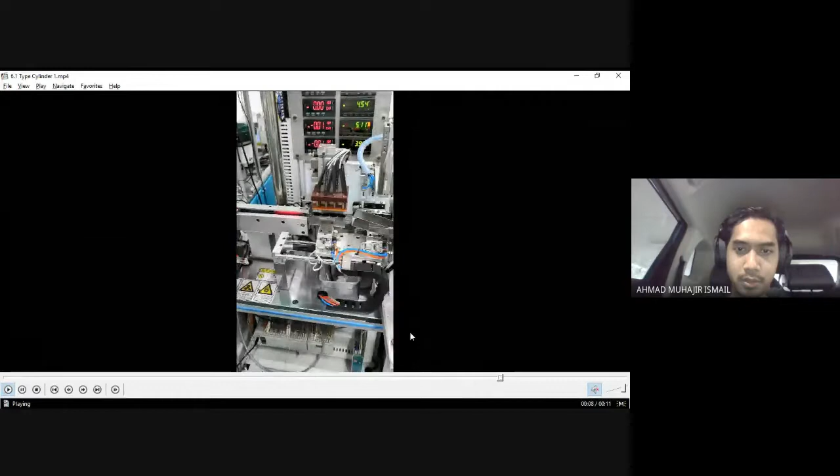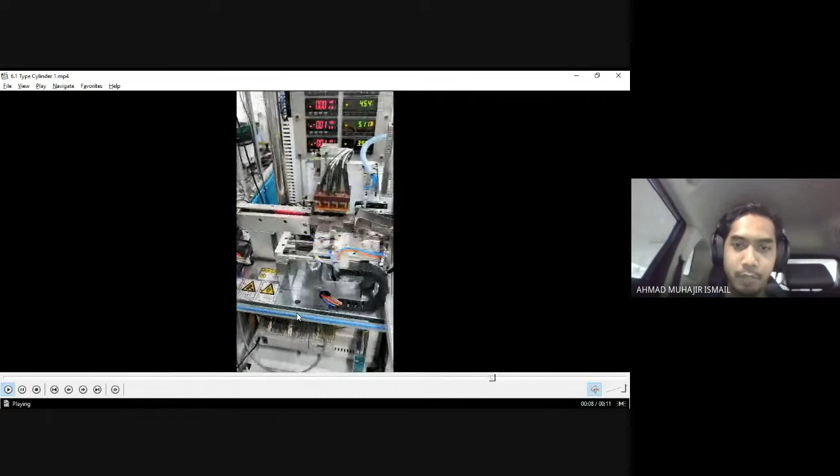Contoh pneumatic system yang kita guna as a transferring product. Kita pick and place lah. So dalam sistem ni kita cuma ada yang mostly kita guna adalah linear cylinder, movement forward backward, dan kita ada turning dan chuck. So tiga ni mainly used in kita punya factory lah.

Macam konsep ni just transfer from one conveyor to another conveyor. Simple. Walaupun kompleks mana pun, yang ni basic lah, selalunya kita akan guna. Dan kita ada belting conveyor dan so on.

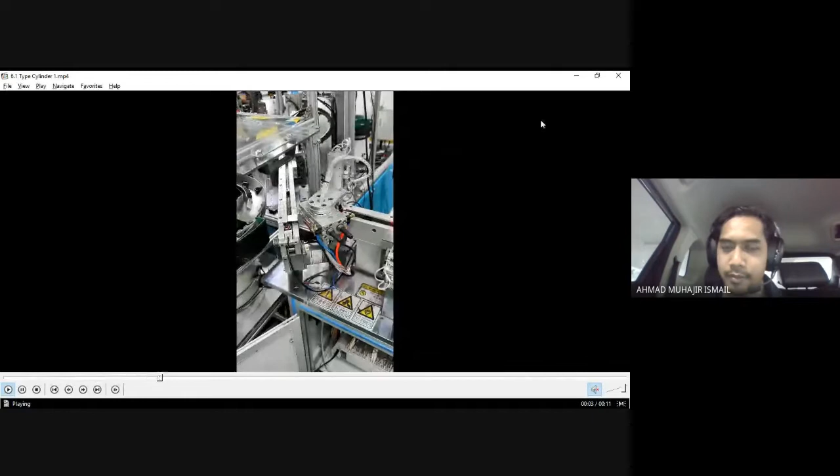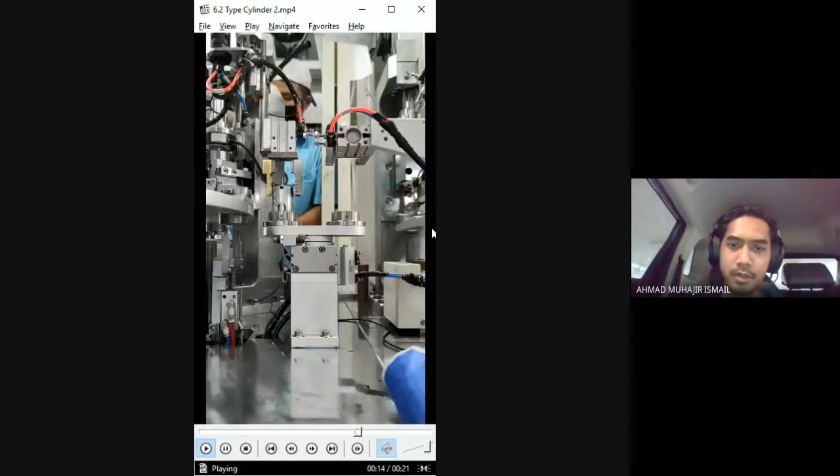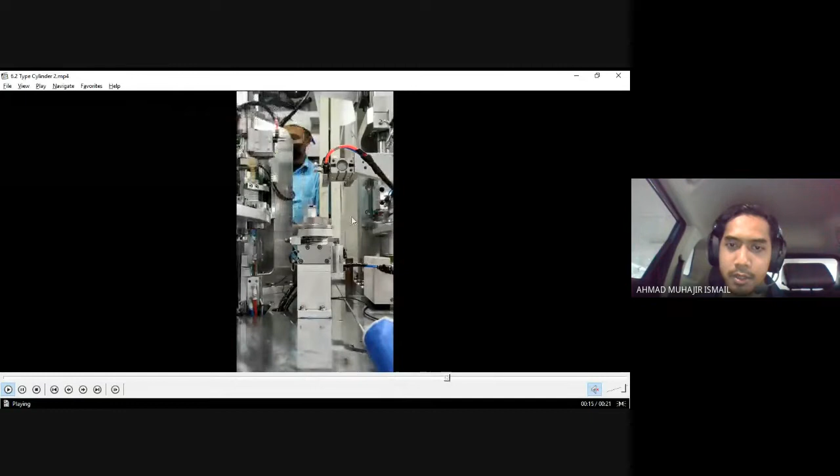Satu lagi. Sini yang dah motor kita transfer daripada turntable. Dan sini kita panggil turning cylinder. Yang ni kita boleh control 180 forward backward. Dan kita ada chuck yang move up down dan clamp.

Macam ni lah. So boleh nampak dekat mana pneumatic lah.

So pneumatic ni kita control by PLC. PLC akan generate the supply to the valve, dan valve akan control the flow of compressed air. So ini antara PLC yang kami guna. Saya sharekan.

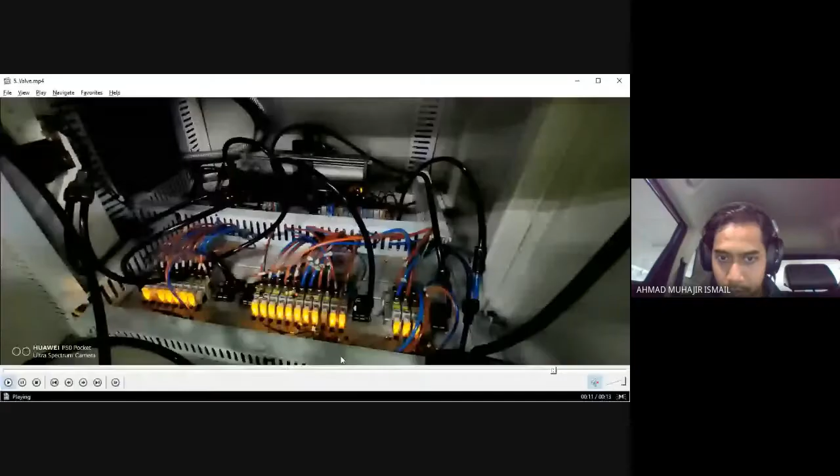So the valve, flow valve, okay, ni kita punya valve. Lihat. So nampak lampu yang menyala-nyala tu, 24 volt dah masuk dan dia akan open the valve, flow in dan flow out.

So sini kita ada satu kita panggil booster untuk control the pressure in our machine sebab mungkin daripada kompresor kita jauh, lebih kurang mungkin dalam 100 meter daripada mesin ni atau mungkin 200 meter dekat kita punya sistem. So mungkin akan dapat less pressure drop. So this booster akan regenerate the pressure untuk maintain our requirement pressure for our machine. And we use about 0.5 MPa.

Okay. So far ada apa pertanyaan tak? Clear?

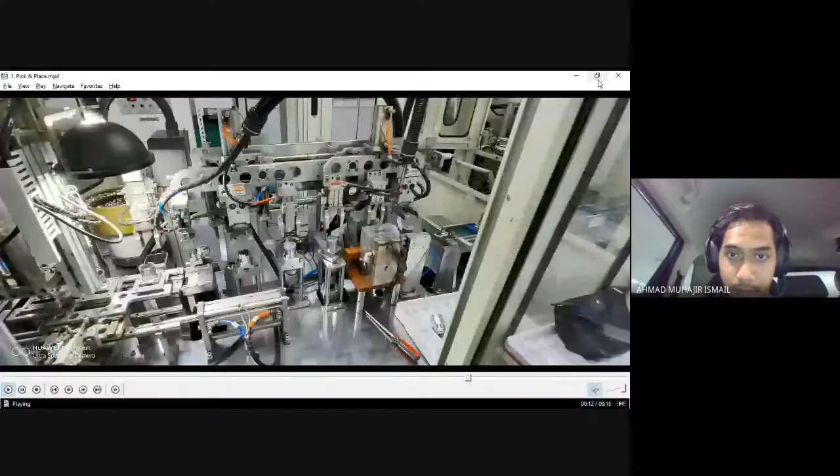Okay, this is an example, you can see. This is how a frame is transferred, we are using a pallet, then there is a transfer post by post.

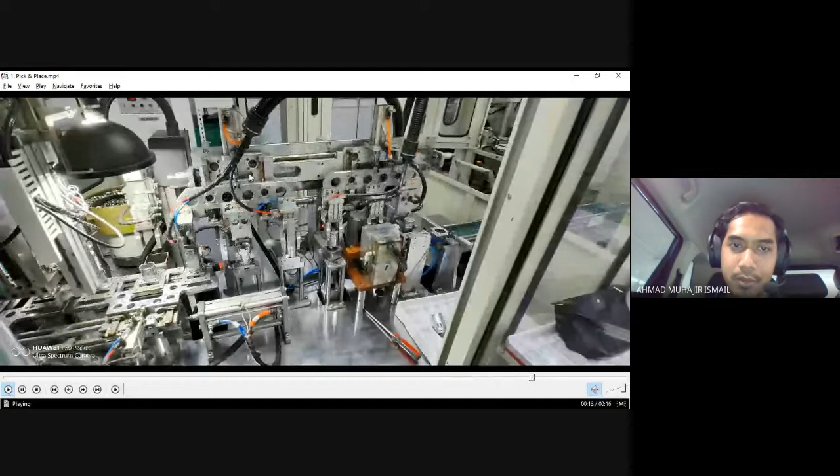On the safety matter, this chuck must be open. Every chuck has a sensor to make sure everything is open, only then this thing can come down to pick the product. In case the chuck is not open, it will hit the product. Same with movement forward and backward, there's a sensor to make sure this cylinder is up or down. You can see this red color meaning the position is up, and when it goes down you'll see it blinking red below. So we make sure both cylinders are up before we can move forward. So many sensors are involved to make sure the movement is safe.

Okay, next, another pick and place, I'll show an example.

So here we have a sensor to detect the product, and we pick up, then move to our desired location, then we place it. So there is an auto feeder to supply this one, inductor, and the front is our capacitor terminal.

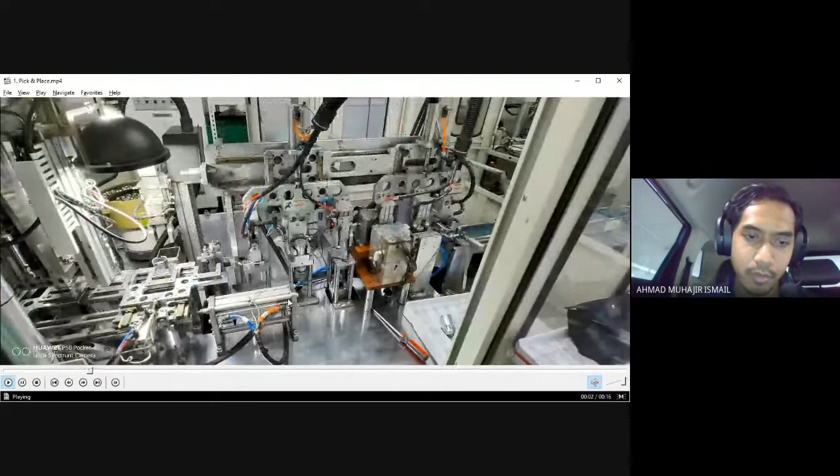Same here. So this cylinder valve turn on, then the airflow will go to the yellow to move the stroke out. And valve off, then airflow will go to the blue tubing to retract back the cylinder. Nampak? Boleh faham? Ada soalan?

Dalam chatbox ada satu lagi soalan. Okay, if we want to do maintenance on the section, do we have to stop everything else?

This is tricky because production they will try to run, and on the maintenance side we try to stop for our safety. So on the maintenance side we have to schedule it properly dengan production member. Some maintenance need to stop, some maintenance can be done online. So depend on what type of maintenance we want to do. So the best is operate online, but there is a safety concern.

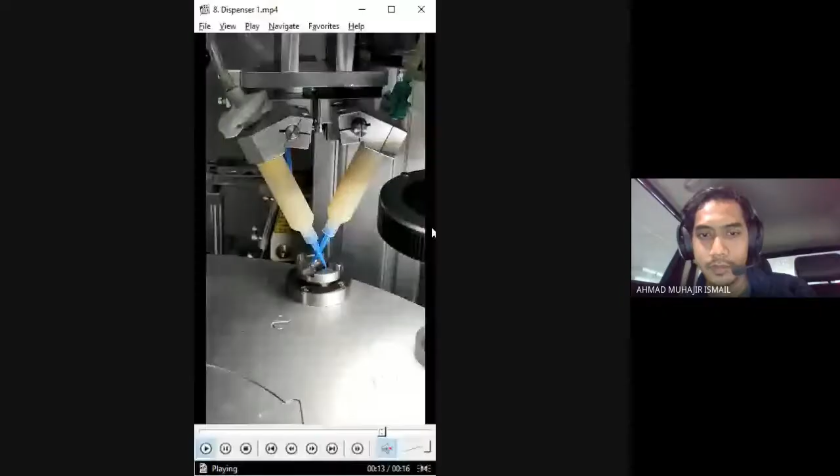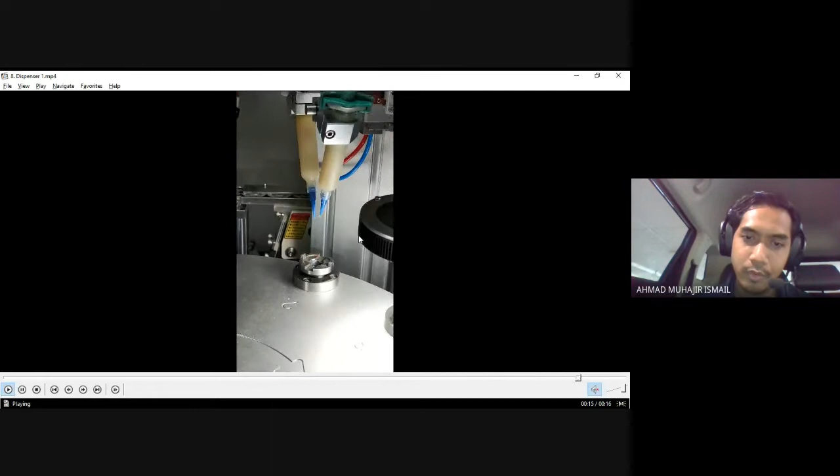Sini contoh dispenser. Saya belum tunjuk lagi kan. Di sini kita apply dispenser, apply grease, control by dispenser. So except a movement, we also control to dispense a semi-solid. And also sometimes we can apply the oil using a pneumatic system. So macam-macam boleh buat.

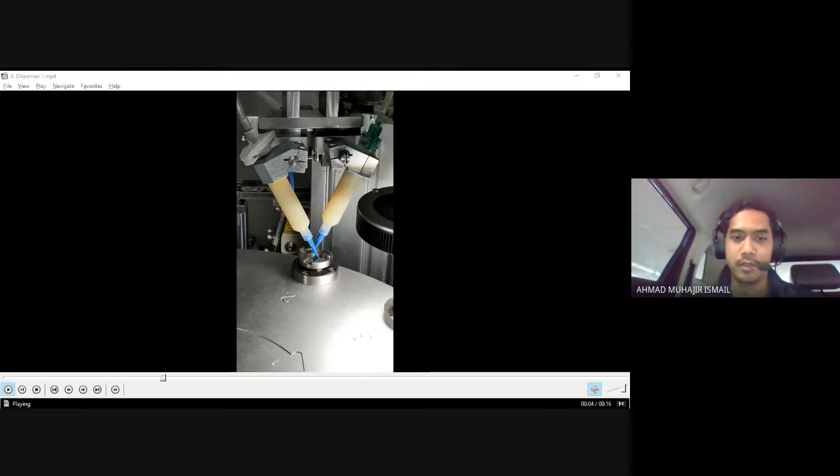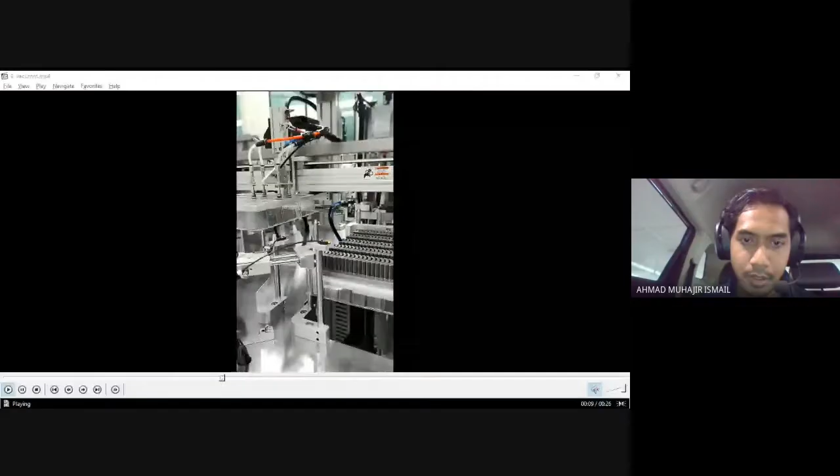And next, maybe there is a vacuum. There's vacuum. Okay. Example, the application for the vacuum. So kita boleh guna compressor untuk vacuum, blow, cooling part compared to the cylinder alone lah.

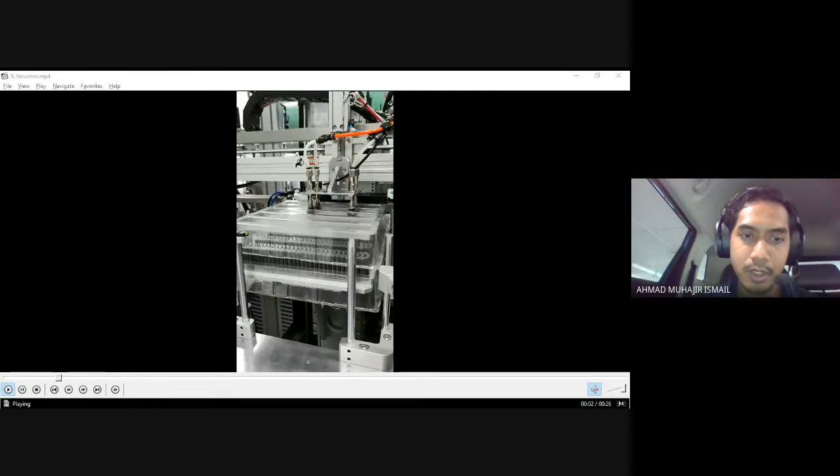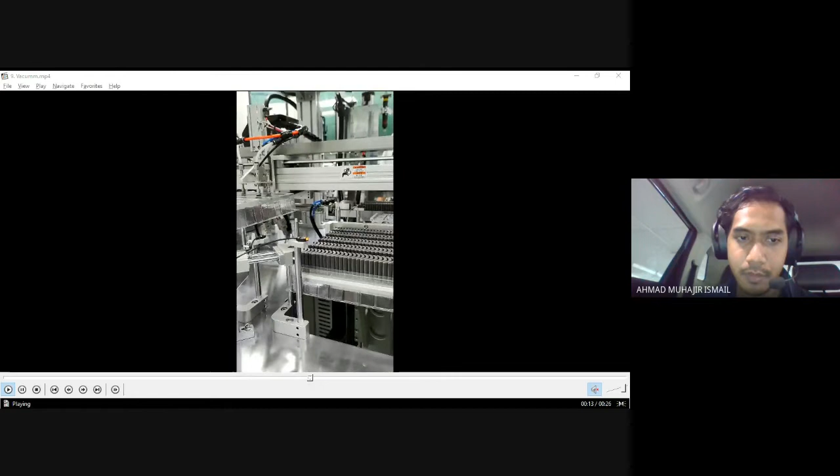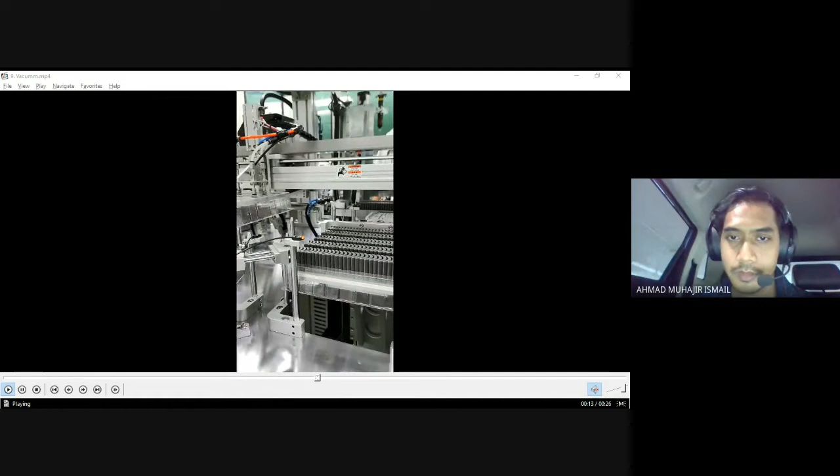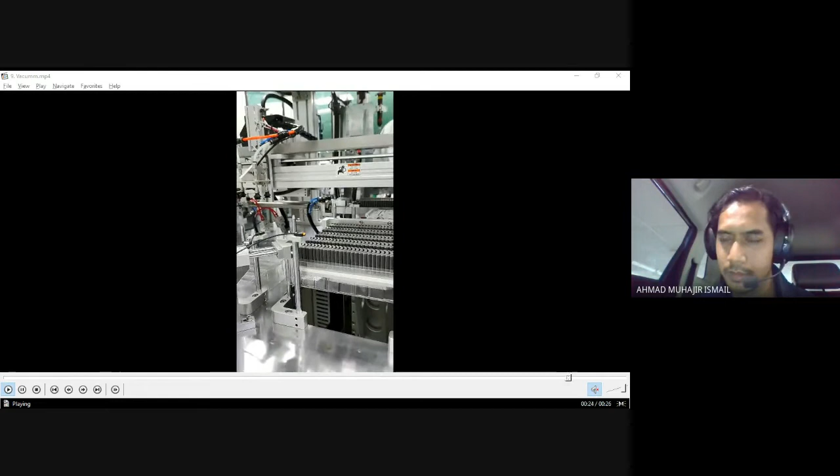Okay, ada apa-apa soalan lagi? Okay, so any question? So ada soalan?

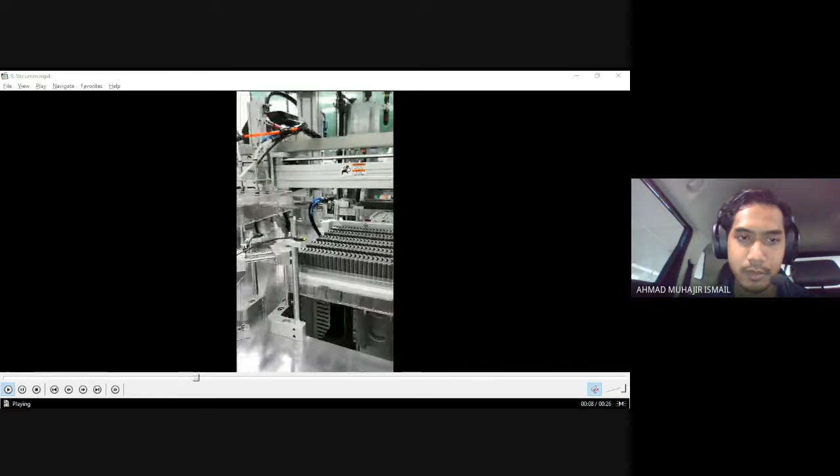Next is move to working. Kita share sikit. Untuk pekerja ni sebenarnya kita ada different area lah. Macam bahagian saya untuk design machine is under design team. Then there is a under maintenance team. So everyone have a different KPI to achieve.

As for the maintenance, first is to reduce the breakdown, to do the maintenance on the machine properly. And as for design team, we have to design the machine with a constraint budget first. Then we have to design the concept to achieve what we want to do to our product more efficiently.

And the best design will go to how less we apply the movement. So if too many steps, then also affect the cycle time of the machine. To produce one product will take longer time. So the best design, it can minimize the total step of movement. For example, if we want to move from A to B, how fast we can move it.

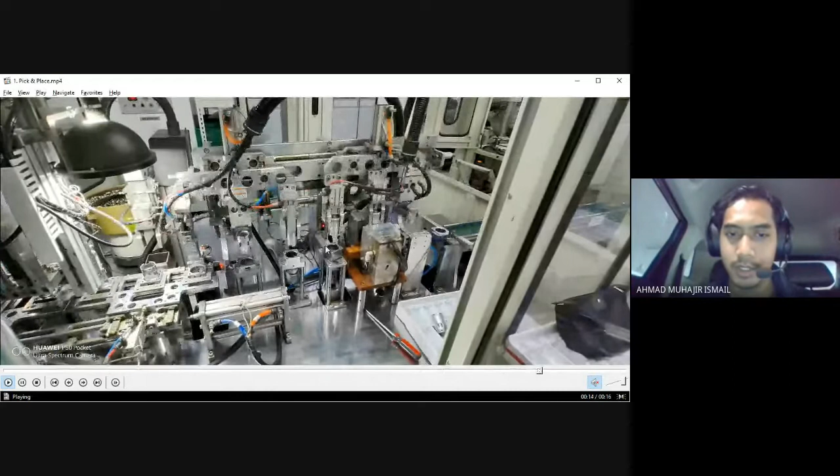So there is a different method to move the product alone. But this is necessary due to how to apply the chip, because this is need to piece by piece to get into the charger magnetizing. So as a designer, the best design will be less movement is the best.

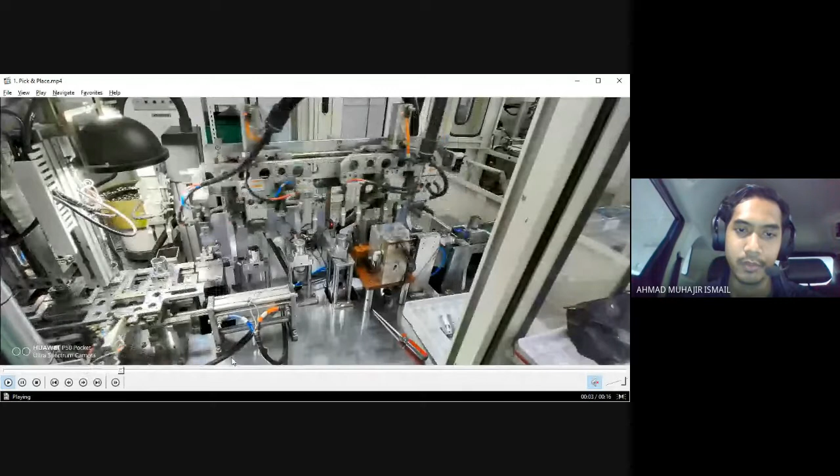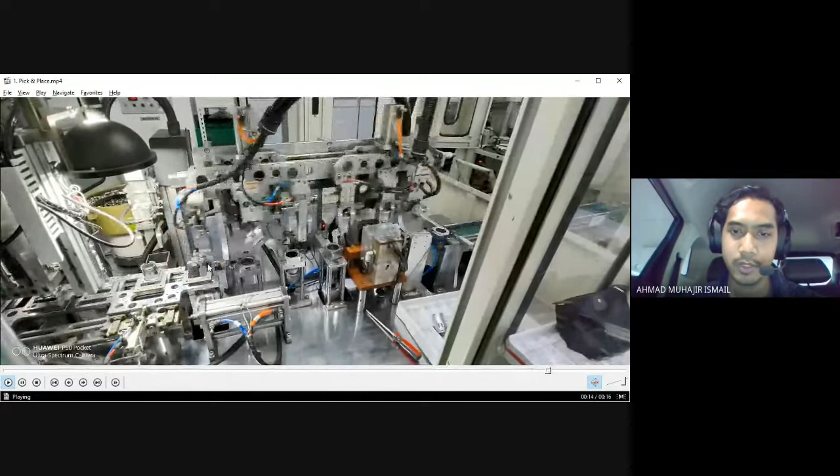You need to be more creative. Maybe some other company has a different method which is faster than this one. So design theory needs to be more creative actually.

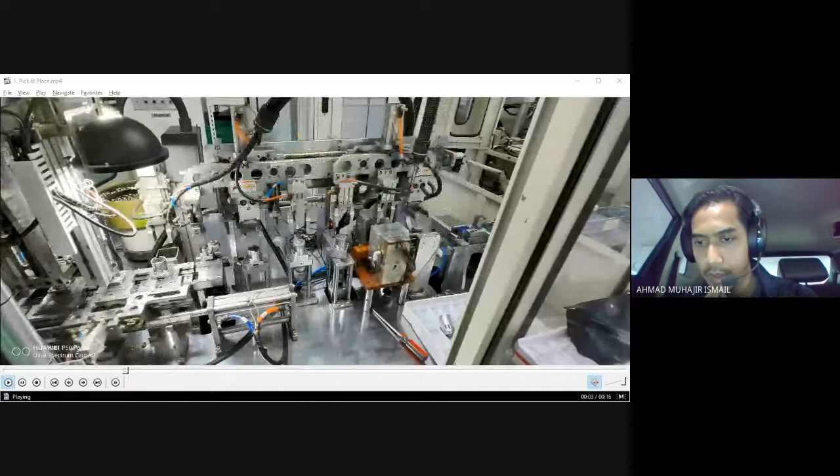Chatbot question from Sir Fakru Azim: How many pneumatic components are newcomers able to work on?

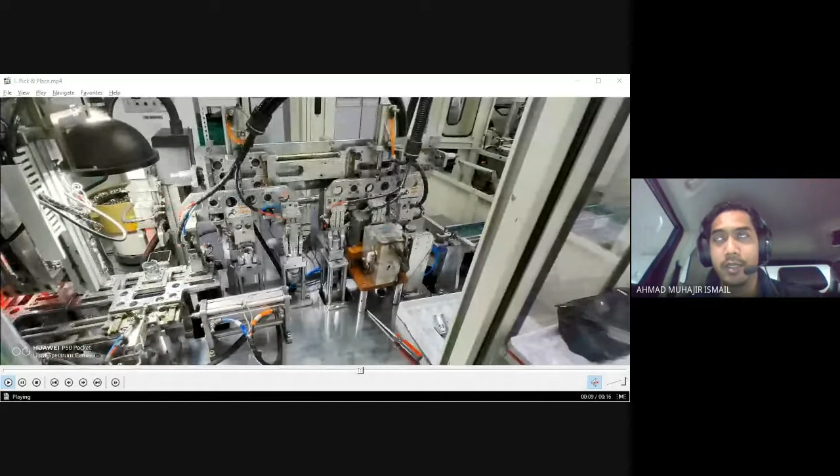In case you want to learn, we have a development area. This one is not fully attached to production, but you have to do it on your own time, outside working hours. So if you're willing to spend time, maybe if you're on morning shift, at midnight you can go to play around at the development center.

I'm just talking about Minebea alone. For the company overall, I'm not sure.

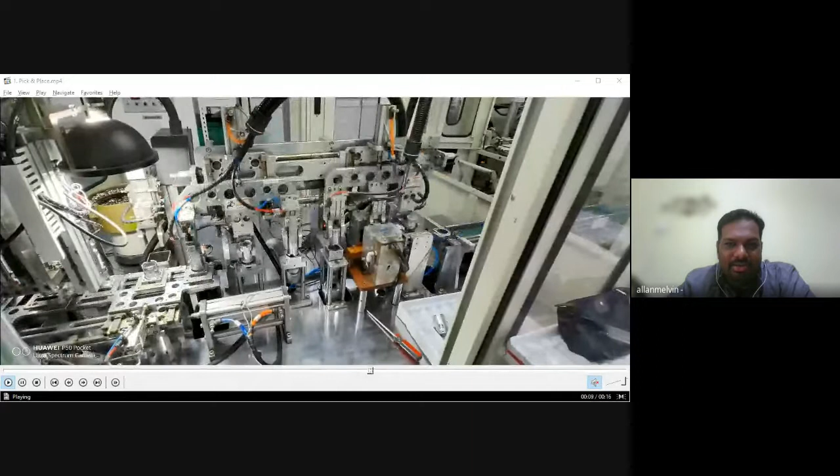These 3 plants, the products are different. For Sungai Petani, we produce a DC motor. For Batu Pahat Johor, we produce an adapter charger, so this one is totally different. And for Klang, we produce a car key, also different.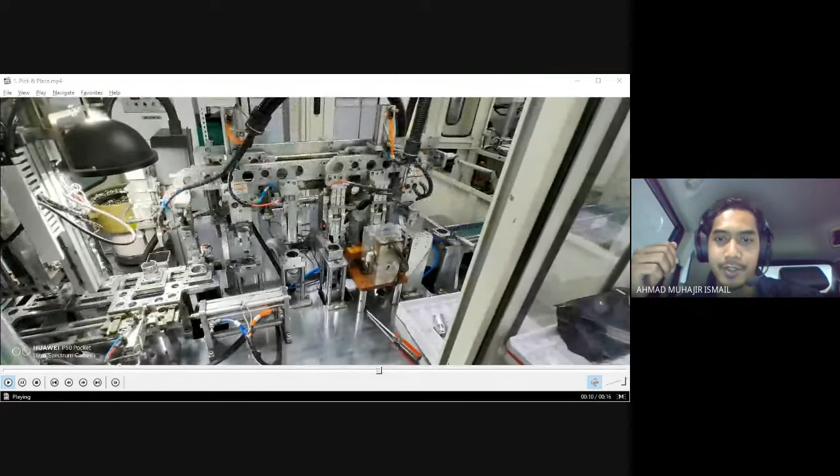So unless you're in charge of the machine, there's a chance. For example, myself, I'm in charge of Sungai Petani, but I'm stationed at Klang. So on the machine side, there's the same technology we can apply at any plant. So there's a chance to shift. Unless you're under product design, that's totally different, you have to start from the bottom again.

And also we have a chance to go to Japan. For example, myself, I already went to Cambodia, Philippines, China. So if you're able to get into the MNC, multinational company, there's a chance to travel.

Except during this pandemic. Before this, I always went overseas, because the technology is about the same.

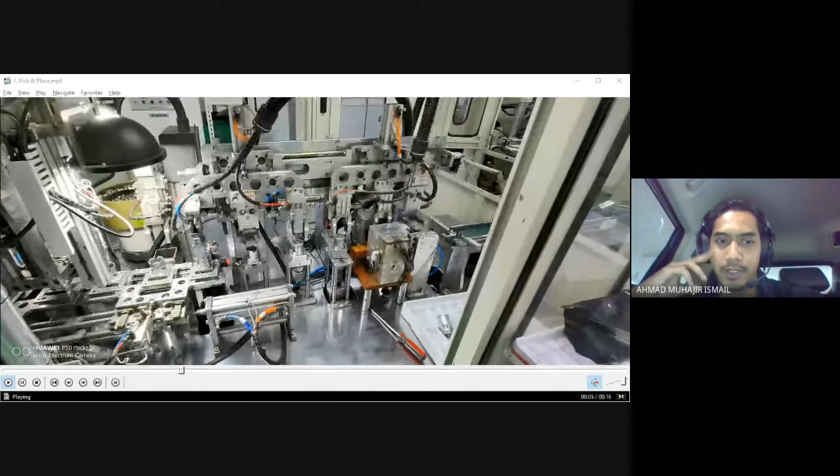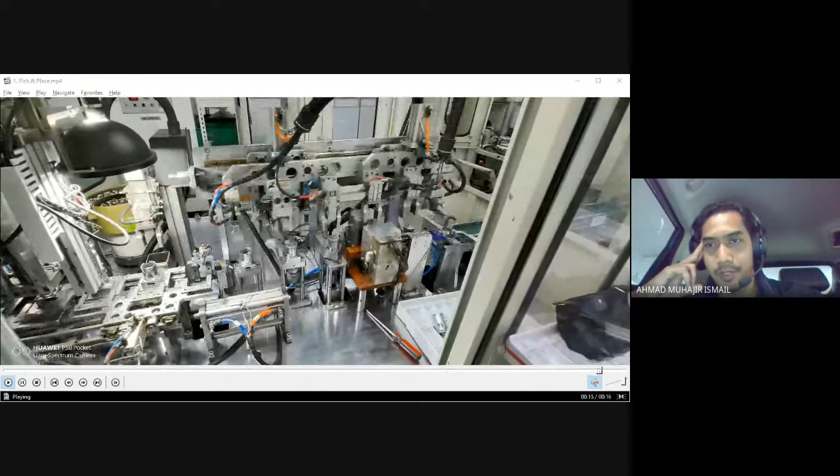So if your technical skill is good enough, Malaysia is the best team in our organization, because Malaysians are well versed in English compared to Japan, unless they're new. So Japan will use a Malaysian team first before going to Philippines or Cambodia, and we also have a station member at Europe and USA. So Japan is the lead, but they use a Malaysian team as the main one. There's an advantage for Malaysia.

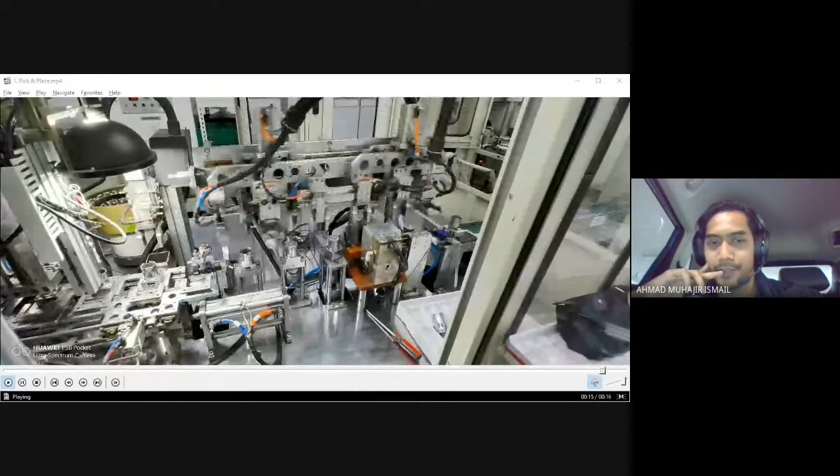And also being from UniMAP is one of the advantages actually. Industry really looks at UniMAP students, so the expectation is quite high compared to others, because the seniors already put a lot of hard work to make sure UniMAP students are the best.

I think we have one more question here in the chat box. Okay, next is Putra Nadi: What will happen to the unqualified product during production?

Okay, this is what we call NG, not good product. It depends on how bad the product is. If it can be reused, it will be reused after some repairing and debugging.

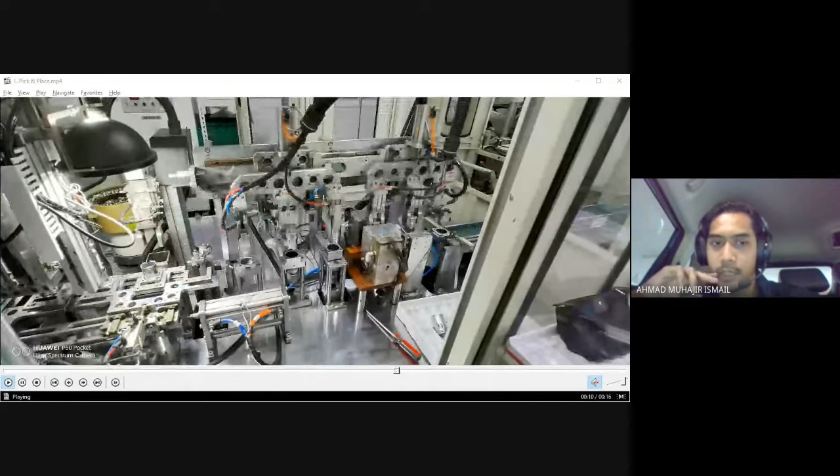If the defect is too high, then we scrap the product. So NG happens for many reasons. First is manpower, and also machine, and also sometimes the product itself, the material.

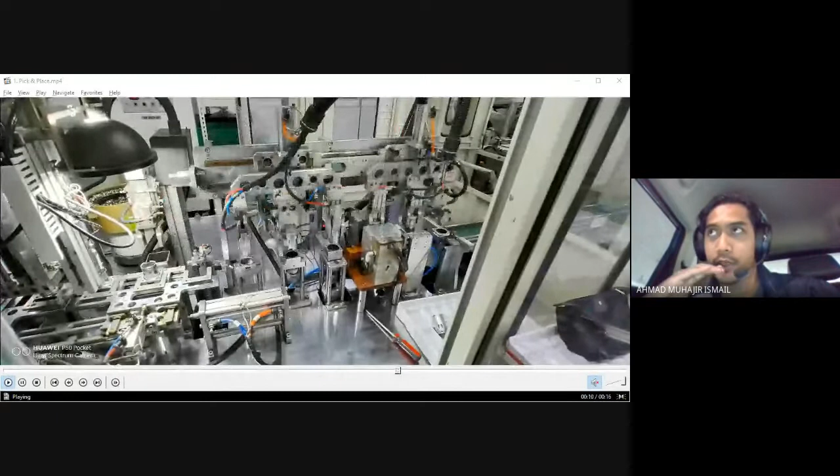So if there's damage, we have 3 ranks: A rank, B rank, C rank. A rank totally cannot be used, must be scrapped immediately, and must be passed to the supervisor to avoid it flowing out to the customer.

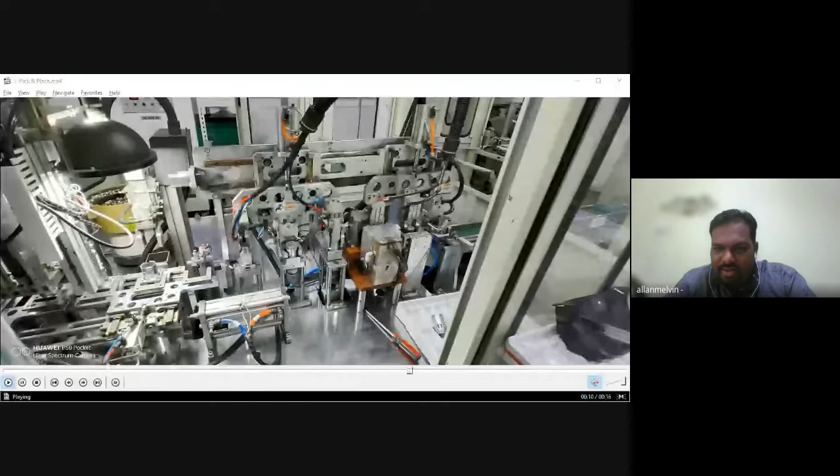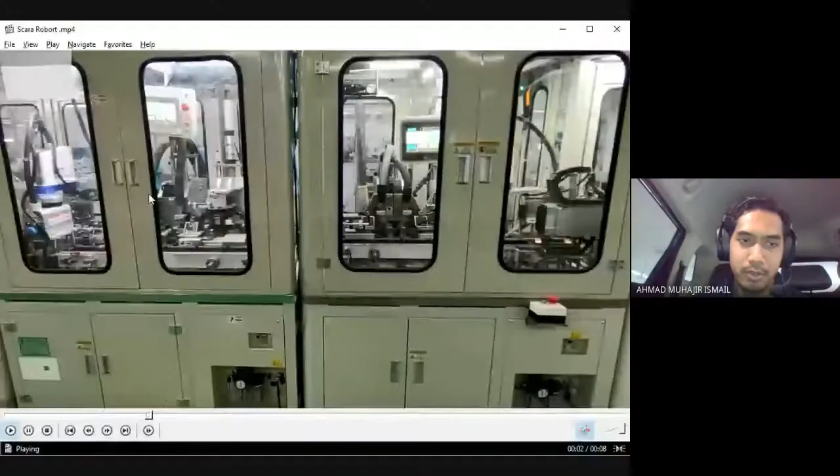So just to share, most still use pneumatic as the main system, but slowly we are moving to robots. For example, here we are using a SCARA robot, because of the flexibility of movement—it can go into tight spaces and move more. This one has 4 axes, so SCARA robots are more viable nowadays. Pneumatic is not bad, but it's limited if moving in 3D. If we want more than 3D, for example 6 axis, then the robot will take its place.

But how about the cost? The cost is very expensive. One robot can go up to, for this one maybe 60,000, for one robot. But we pay for the position and flexibility.

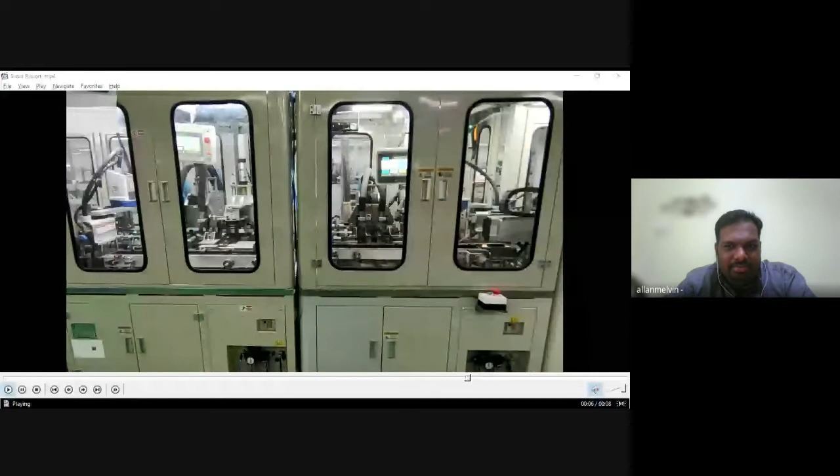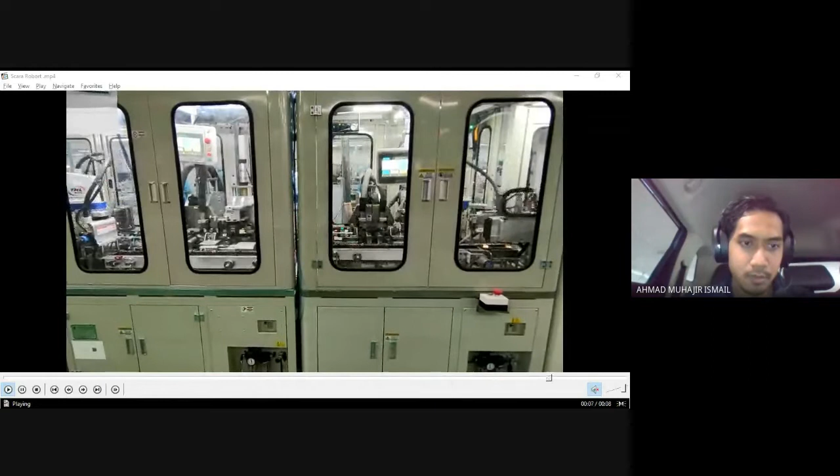But the programming is different, right? It depends—some robots already have a built-in controller. We can just set the position, then the PLC just calls the data by I/O, and sometimes we can use serial communication or an Ethernet port. We have multiple ways to communicate with the robot. But yeah, the cost constraint is very high at the initial cost.

Anyhow, to justify the air compressor cost, the running cost can also balance out in the long run.

So how about the maintenance for this? As for maintenance, I think we just need greasing, same as for pneumatic systems. So the maintenance is the same, except for the breakdown cost. This one has already been running for about 2 years so far, so it's good.

Mostly for business, our investment payback will go up to 5 years. If it lasts more than 5 years, then it's good enough.

I think we have another question in the chat box: what kind of philosophy is needed in engineering? Philosophy is needed—how so?

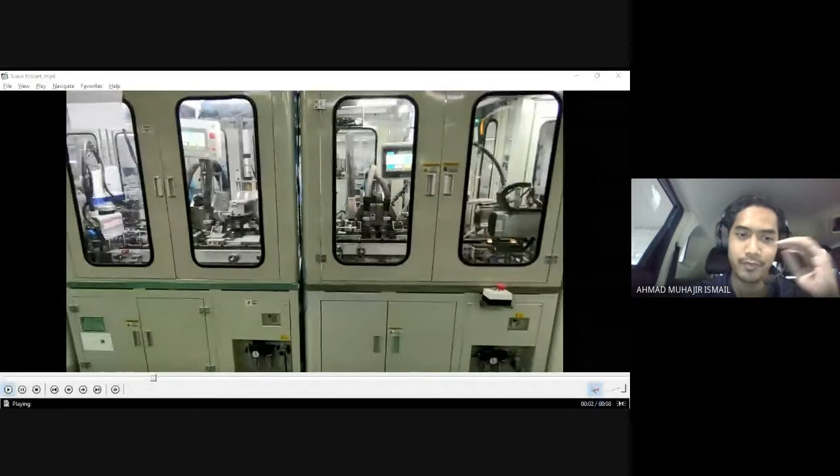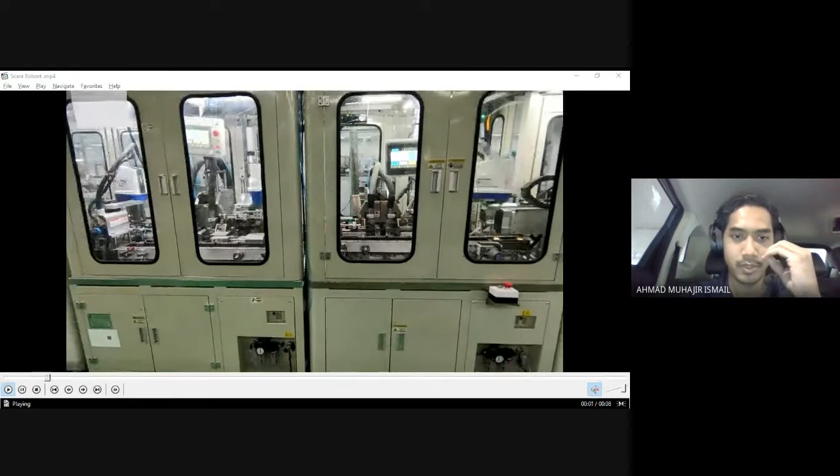So the solution is not always fixed. For example, one day we move in this direction, then in the next 3 days, one idea will come: why not we move it like this? So it's always changing in manufacturing. In my experience, already 8 years, there is no one solution from the beginning until today—it's always changing. As an engineer, we have to explore whatever opportunity we have, or maybe match other technologies. We must utilize it.

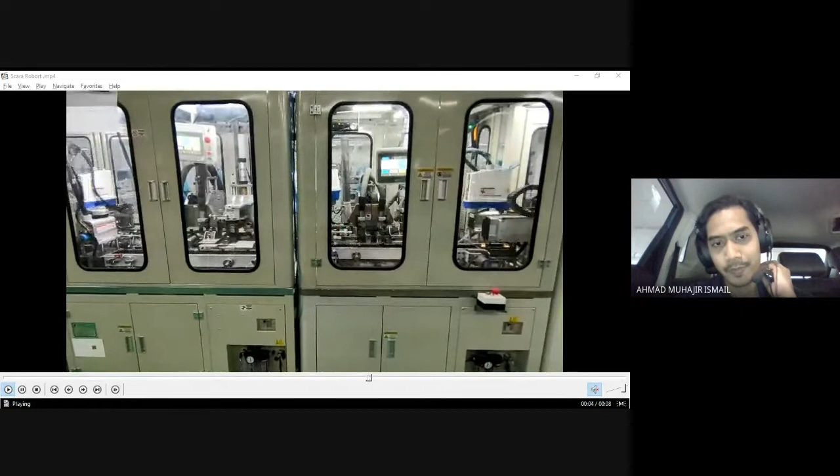What is your hardest project, and can you talk about it? Hardest project... in my experience alone.

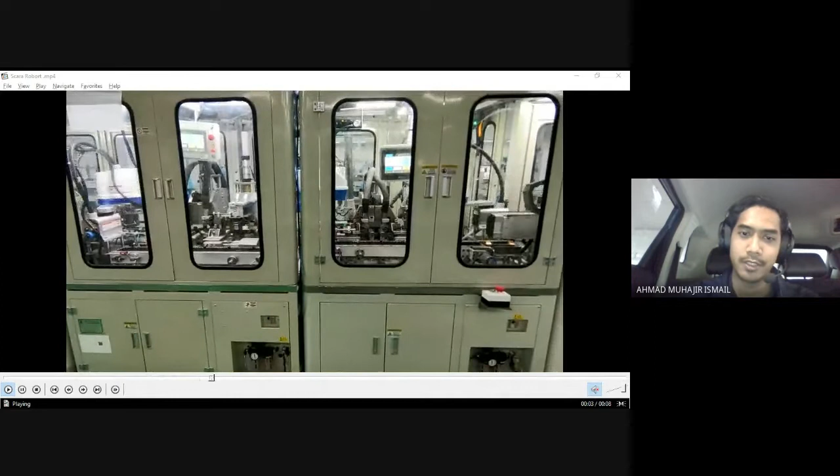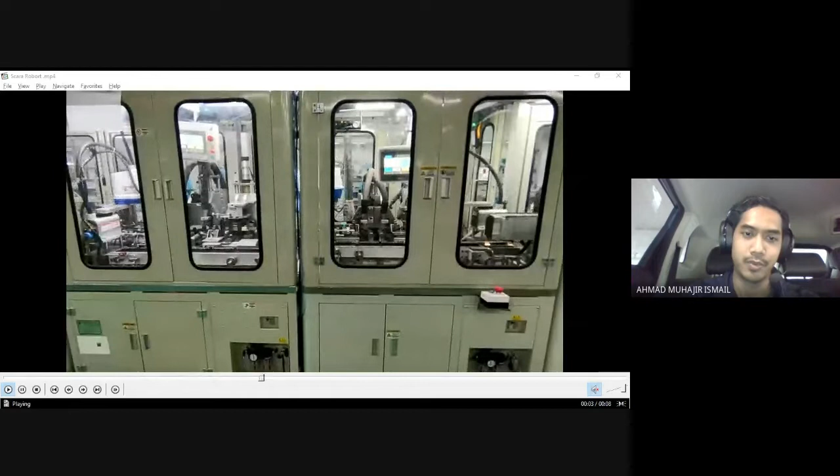My hardest project was during the pandemic, because we wanted to develop a new production line. This machine was actually a collaboration between Malaysia and China. Then during March 2020, we had a lockdown, and the China team had already arrived but had to go back. Soon after, we announced the lockdown.

Then myself, as the only engineer available for machine programming in Malaysia, also had to maintain our mechanical and electrical team myself. Compared to our plan, where we had about 20 manpower combining Malaysian and China staff, we ended up with only about 8 members. So this was a very tough situation last time.

Even though we could communicate using our communication tools, on the mechanical side we still had to do hands-on work. And also, we needed to meet a deadline to deliver to our customer by the end of the year.

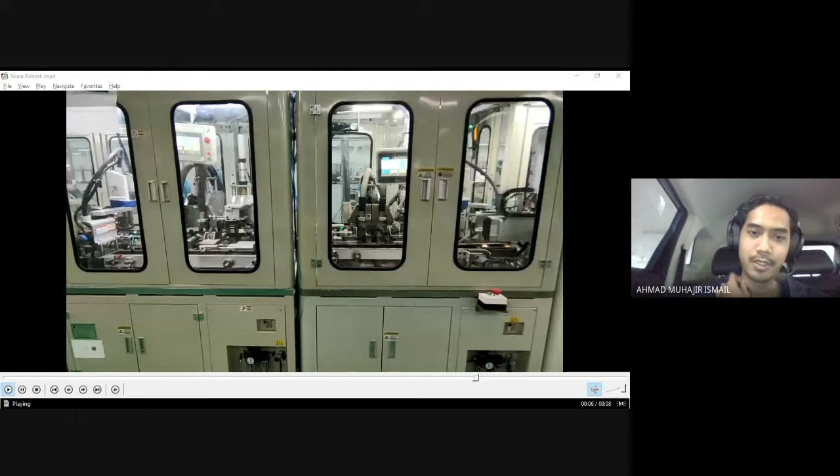Also consider that the customer, Continental, is European based. Their standard is very high compared to Malaysia and Japan, very high. So you have to meet their standard. Yeah, this is my experience.

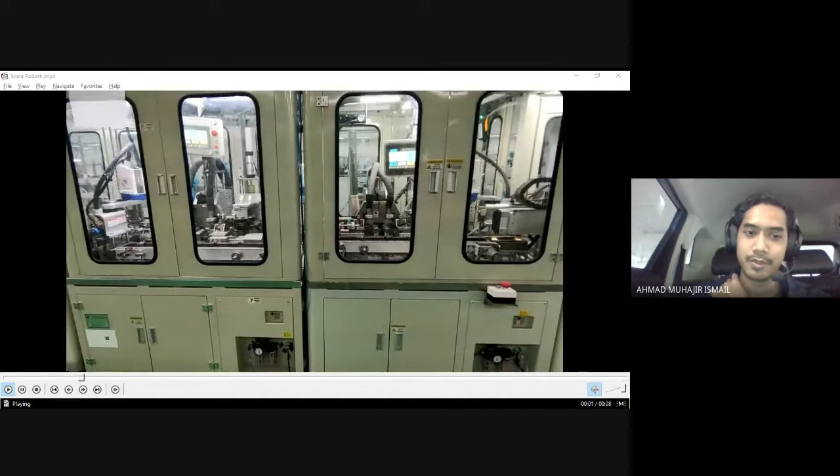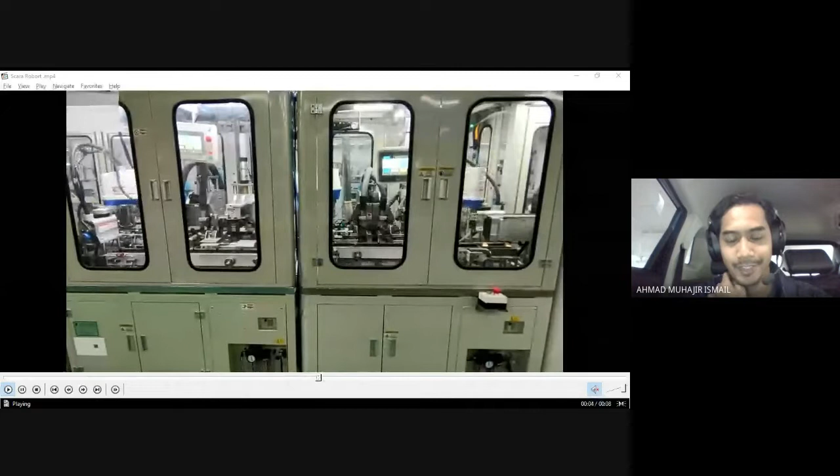Anyway, don't give up. Finally, we were still able to achieve it. We can go through it, just don't give up, just put in a lot more effort. If previously we used 7 to 8 hours, then you have to contribute 12 hours a day.

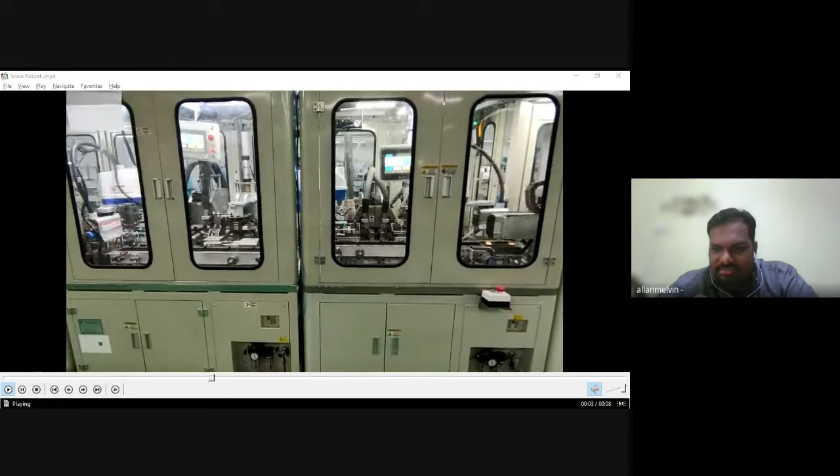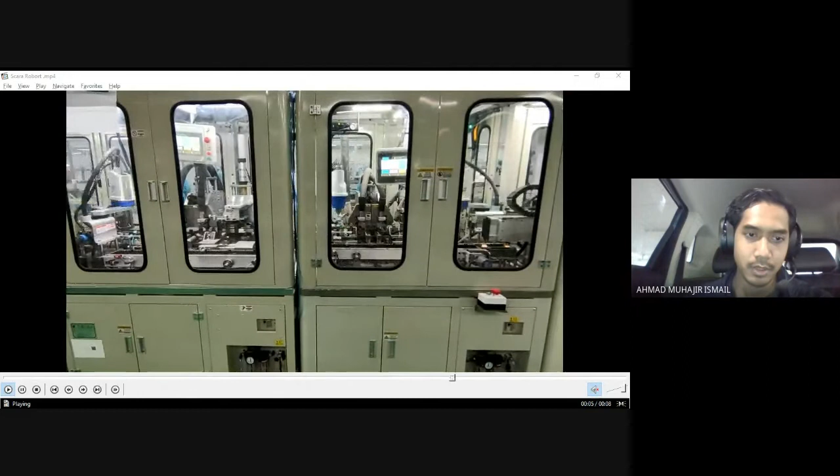For the hydraulic side, I actually wasn't well prepared, very sorry, but I'll just share about the press machine.

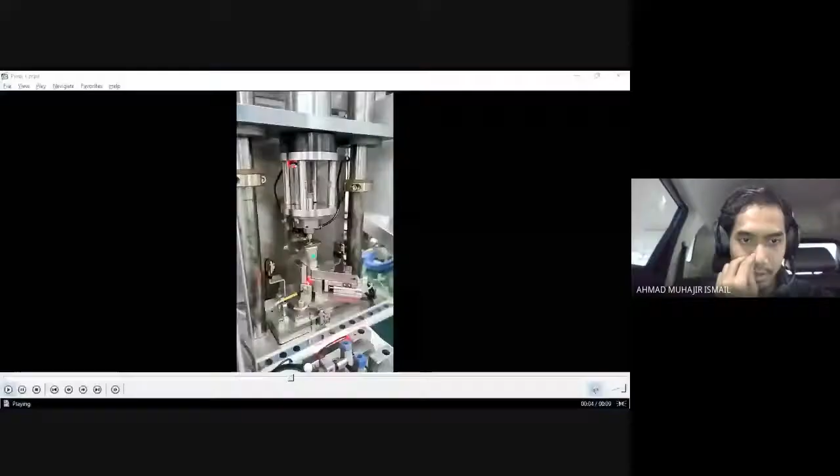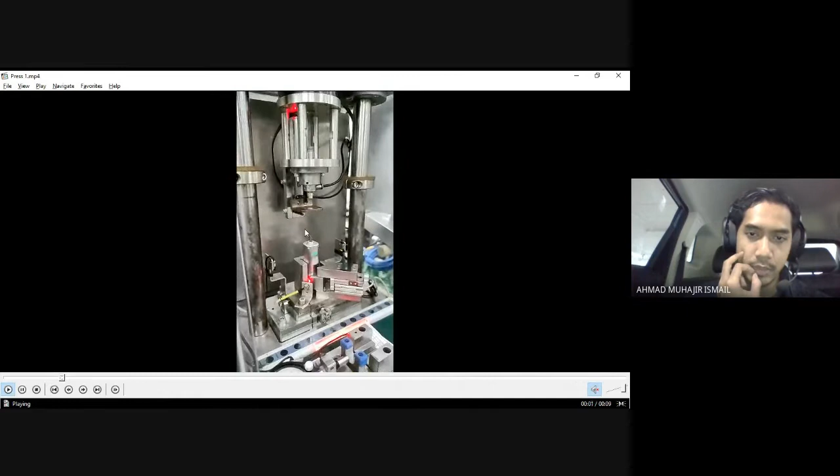Okay, here there is a press machine. This is how we usually apply the hydraulic system. Because hydraulic is more precise, this one is a gear insert — we insert the gear. So if you are using a pneumatic system, the precision is not good enough compared to the hydraulic.

Okay. Also, the load applied for hydraulic is higher than pneumatic. So if we want to use a heavy load, then we will decide to go for the hydraulic system.

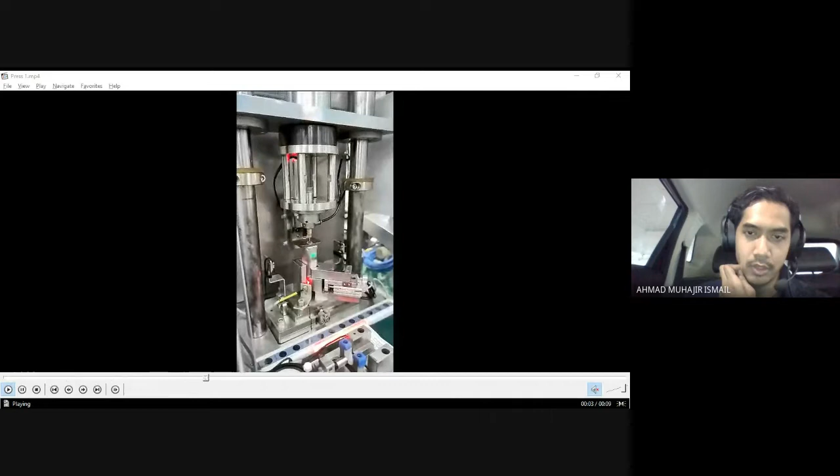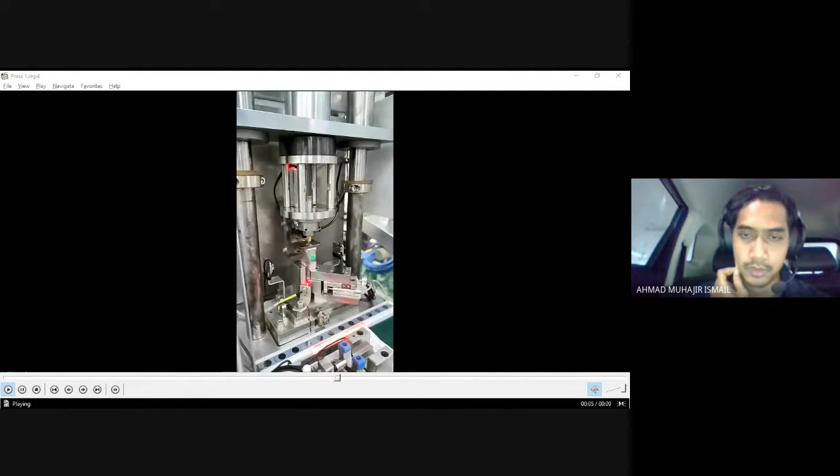One more — the second one is also a press machine, same concept. So when we decide to use a heavy load, we go to the hydraulic system. The rest we go to pneumatic, and also motorized.